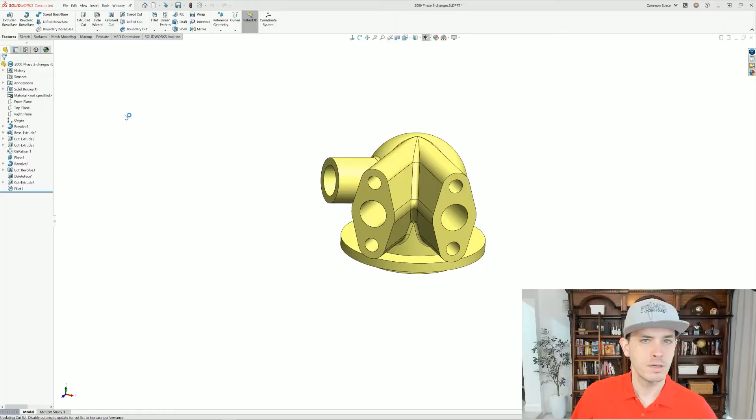How do we check this? Well, we check it by looking at the mass, if there's a material applied, or the volume. So right now, no material is applied, so I'm gonna look at the volume. So evaluate mass properties, and it's telling me here that I have this much volume.

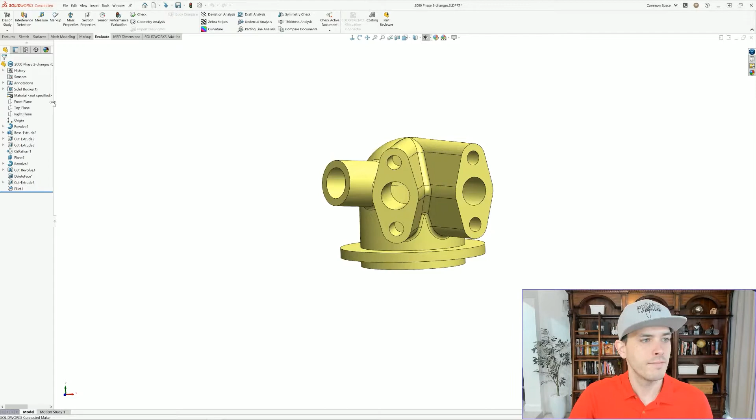13.4 cubic inches. If I right click and I apply a material, so just plain carbon steel, whatever is called out on the drawing, make sure you apply. Mass properties now 3.7 pounds.

If you were participating in the design competition, this is your answer right here for part 1. And now you'll have to do it all over again. But luckily this year was pretty easy, just 3 changes. So let's take a look.

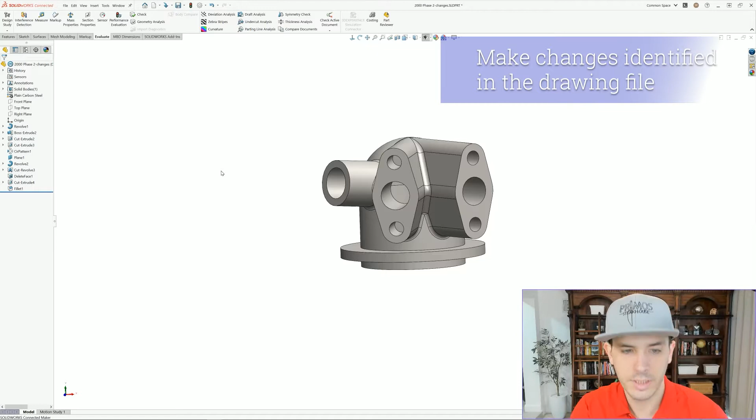First thing I want to do for my changes is features. Make sure Instant 3D is turned on. With it turned on now, I could just click on the model itself and it will allow me to click on any dimension that makes up that feature, any dimension that makes up that feature that's keyed in there.

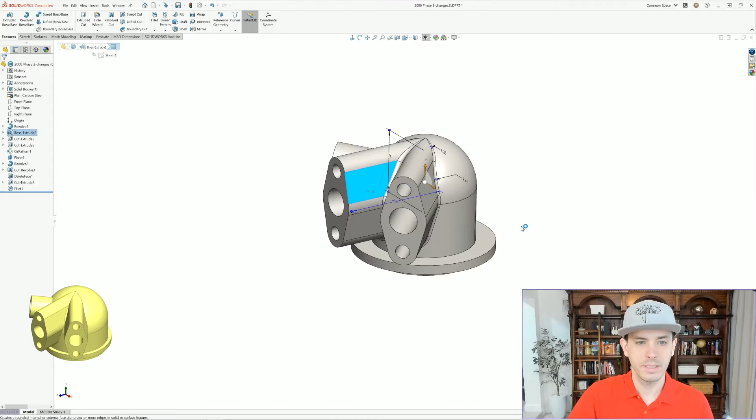This is a pattern you see here, all these features here. So now what I can do is I can click and I can drag this out to make some changes, or double click on it if I just want to do that and I'm not messing around. So 2.7 changes now to 3.4.

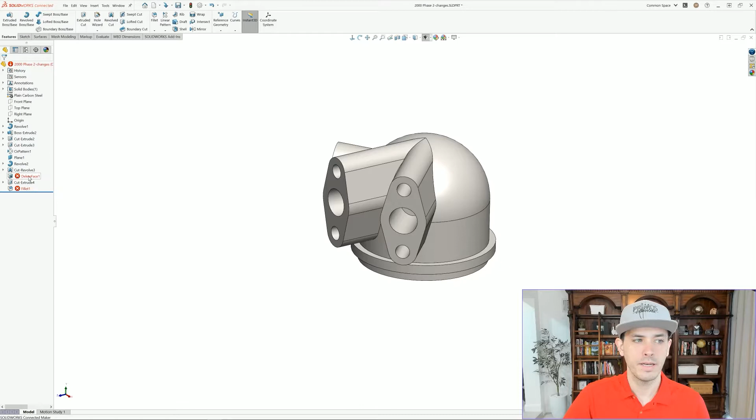Let's rebuild my model. You'll notice have some errors going on here. Okay, so yellow would be an error or a warning. Yellow would be a warning. Red here, this is an error. But what I'm gonna do is actually, I'm gonna just ignore that.

So now the next thing I wanna do is change around that height. So the height goes from 3.35 to 4.5. So just start guessing around, double clicking, seeing where you can find those dimensions. You just need access to them, that's all we need to do.

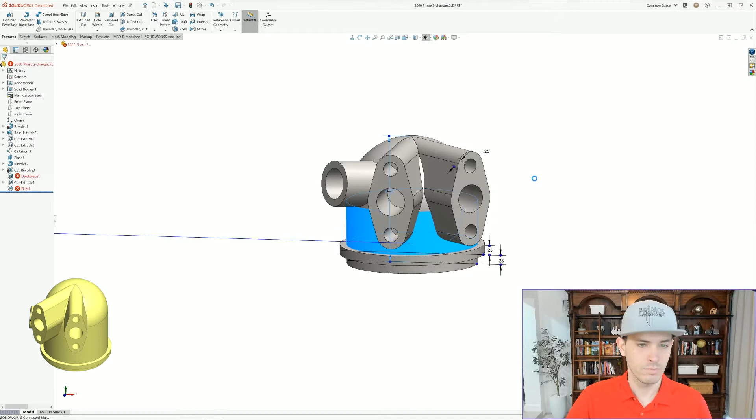And then the last thing was the height of this little, call it the offshoot, changes to 3.5. Boom, like that. Okay, so now let's start taking a look at what we got. Well, actually, my job now is gonna be to fix it. So this is what I got.

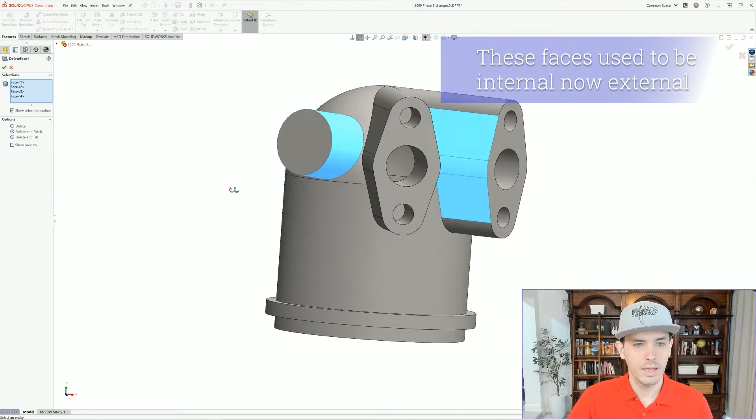You know what? I'm just gonna right click. I can edit the features and see what's going on. And look at the faces now have changed. And I think what happens is if I take a section view here and I look inside, what I'm gonna find is that it looks like I don't need to do that anymore. Yeah, that looks good on the inside there. Cool, so it kind of took care of itself.

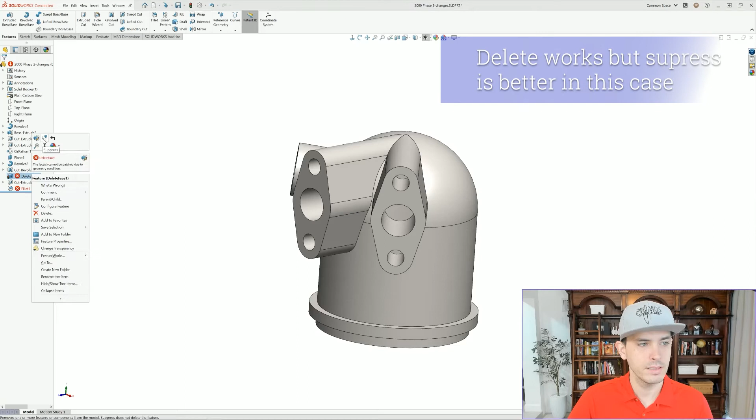I'm gonna right click on this and I'm actually gonna suppress it. Totally could delete it, that's fine. Suppressing just removes it, it's kind of like a delete that I can actually undo if I change my mind, because this is a competition here. I don't really know what's gonna happen. I'm just gonna try to figure things out and kind of guess along the way and hope I have it right.

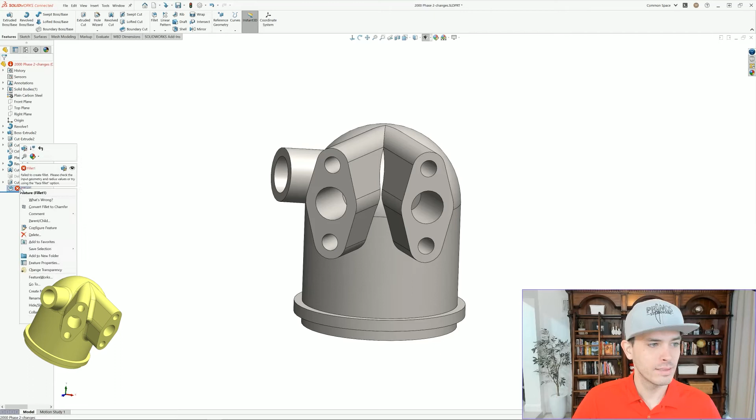Okay, now next thing I'm gonna do is my fillets. I'm gonna edit the feature, take a look at that. Okay, missing edges. I could just start clicking around here. Which edge is missing? I'm gonna just drag this down to change it. See that? Okay, I don't really know what's gonna fix this. Let me see what's wrong here.

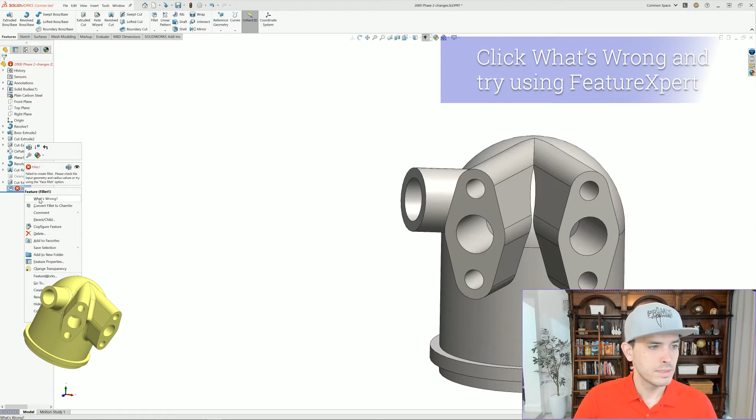If I click this, I can try with FeatureXpert to see if that repairs it. So click what's wrong, FeatureXpert, it will try to. Okay, unable to repair it. That means it's probably gonna be a complicated fix. So I'm just gonna not even spend any more time. Remember, this is a competition, suppress, so I can always go back to what I had.

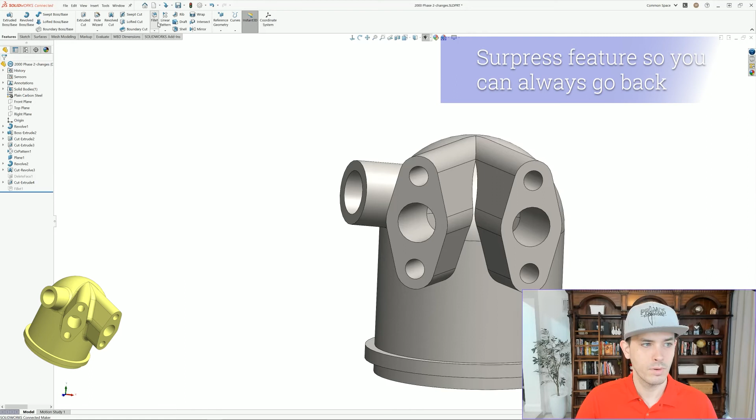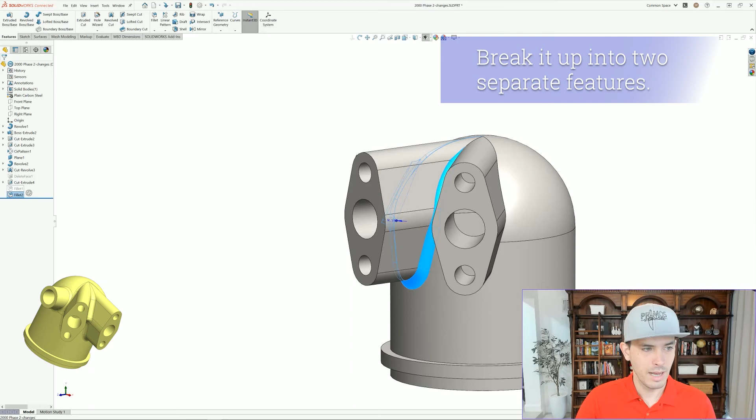And I'm just gonna try my best to do this. Make sure the dimension's correct, 0.188. Click, okay. Remember, looking at our previews, if we have our preview, that means it works. How about here? All right, so I don't have time. I'm just gonna keep going through here and I'm gonna actually just copy it. Control, hold the control key, drop to place it, boom. Super easy like that, there we go.

All right, so everybody, this is phase 2. What's your answer? Evaluate with plain carbon steel. Mass properties, 4.46 is my answer. I hope you got something similar.